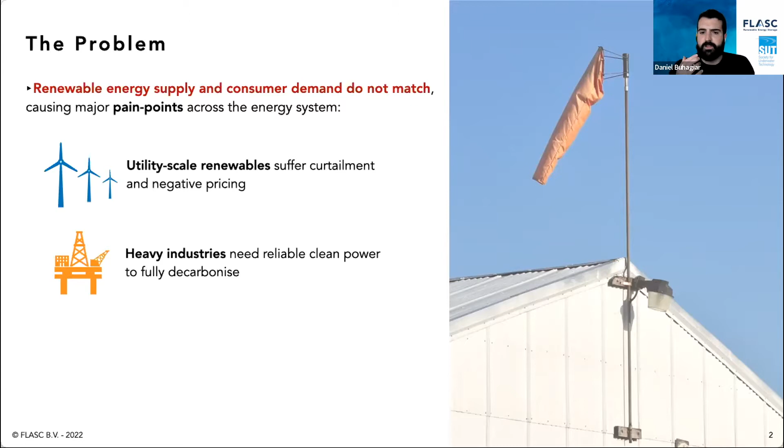And then looking at heavy industries, oil and gas primarily, that is being pressured by both government and political decisions to decarbonize, but also by shareholders and public pressure in general. Decarbonizing offshore assets in particular is challenging because, okay, you need clean power, but you also need reliable power. So it's very interesting to see projects like Hywind Tampen being done by Equinor in Norway. And yet it also raises the challenge of how far can we penetrate with variable renewables until we need storage? And then when we need storage, what are the technology options that can be deployed without introducing new safety risks or without taking up any precious topside space?

And then finally, a bit closer to home for myself, as I said, from a small island in the middle of the sea, we understand what it means to have a congested grid. Especially when it comes to introducing variable renewables, if the grid is already isolated, and even though there is a grid connection to mainland, that still introduces bottlenecks. So when we talk about decarbonizing these types of islands, there are very specific challenges, and these are then compounded by the fact that land is always at a premium and is very expensive and/or just generally unavailable. So these specific pain points are what we're trying to tackle with our solution.

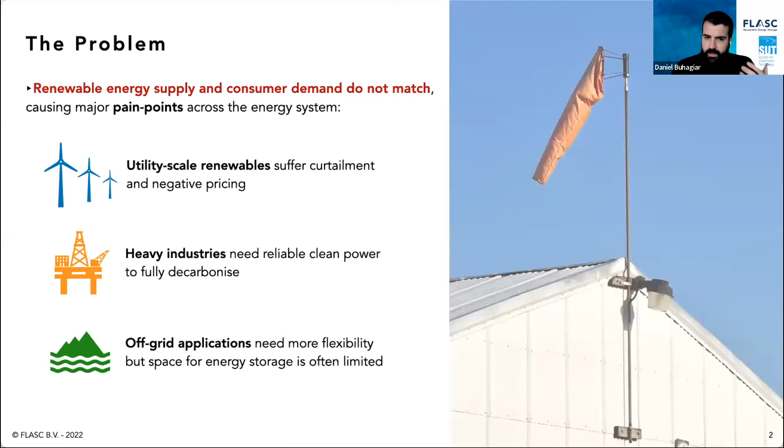And before getting into the technical stuff, just talking a bit more about our strategy with energy storage. So the first thing we identified was that we think the marine environment will be a key part of generating our renewable power. So our question at the time as academics, this was my PhD thesis, was, okay, we can produce power from the ocean, but can we also store some of that power in the ocean? Again, I think coming a bit from our small island mentality, where we look at the sea for everything, like food, energy, and all these resources, it was a natural question for us to ask. And then, of course, we'll get to how we do that. But this is really our philosophy.

So if we're deploying large quantities of offshore wind, can we also co-locate part of that space for storage? So this is one way of looking at it. It's an offshore technology, designed to be deployed offshore, but then there's a more technical way of looking at it from a timescale perspective. So I want to take a little bit of time to explain the different timescales of energy storage and what we mean when we say short duration, long duration, and then hydrogen, and how all these things come together. So this graph is from a DNV report. The technical term is residual power, but what's on the y-axis is basically supply-demand mismatch. So it's the difference between what's being supplied and what's being consumed. And this is a key aspect because it drives the need for energy storage.

And then on the x-axis, we have the different time scales. So what this means is, do I need energy in the next hour? Do I need it tomorrow? Do I need it next week or next month? So this relates to how long does the technology need to store the energy for? How long does it need to discharge it? And within this time scale, as you can see, there is a peak that was already present in 2015 that is on the multi-hourly time scale, roughly almost 1 day. So that's the period of time across which we need to shift the energy, in simple terms, charge in the morning, discharge in the evening. And then as we look at the 2050 scenario, even with different levels of renewable energy integration, this peak becomes stronger, and then we get another peak emerging on the monthly scale.

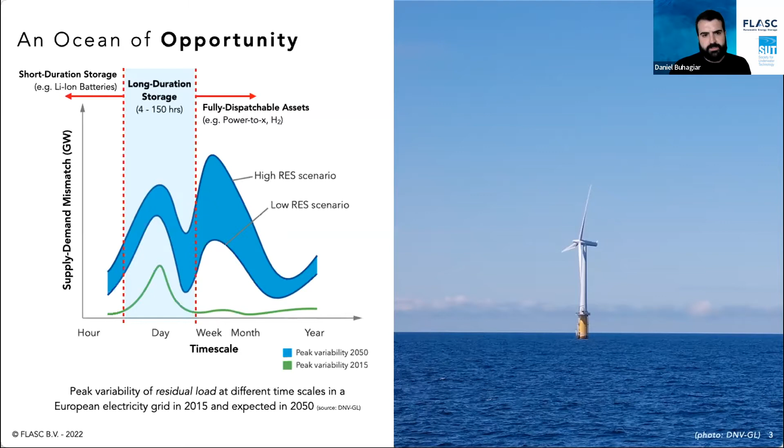So at the end of last year, the consulting firm McKinsey did us a big favor by issuing a seminal report, very detailed, justifying that there is this gap. Yes, we have batteries. Yes, we have hydrogen, but there's still a key slice in this energy storage problem that is not being addressed by either of these technologies, for which we need other solutions. They've given it a name, long duration storage, and an indicative time range. So anything between 4 to 150 hours is now being referred to as long duration storage.

So our technology fits within this gap. Sorry, I skipped a bit ahead. So it fits within this long duration technology space. There are other solutions. I'll share some of these in the technology landscape, but this is primarily where we see compressed air, pumped hydro, thermomechanical solutions, liquid air, all sorts of interesting and innovative solutions that are going to be needed to satisfy this gap.

So I've spent a bit of time on this just to justify where we are in the space. So we're not really comparable to batteries or to hydrogen, just because the energy system will need a range of technologies to address the whole energy storage timescales.

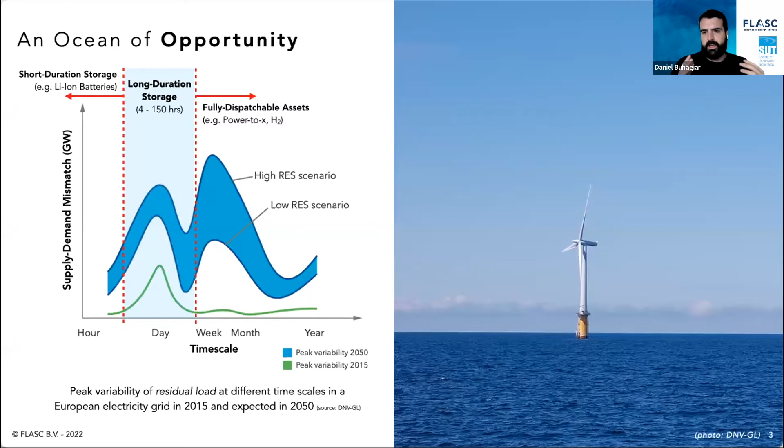So one thing that we're always challenged about is, why store energy at sea? What's the benefit? Why not just put a battery on land or a long duration compressed air storage on land? Well, what's the benefit of also having offshore energy storage technologies, much like we have land-based renewables and offshore renewables? So one thing we're seeing is that in new generation projects, for example in the Netherlands, there's already a challenge posed to developers that they are exposed to more volatility in the market. And this is expected to increase.

So already in certain offshore wind farm tenders happening this year, there are criteria where the government or the legal entity issuing the tender wants to see developers think about innovation, about what technologies can be deployed within the same wind farm project that contribute flexibility, to allow the energy produced by the overall project to be decoupled from the availability of wind. So we see that there is really a benefit, and the ability to co-locate within the same wind farm footprint means we're maximizing the use of the same space that's already been given as a concession to be developed.

I mentioned this as well, but it is a key aspect. So small islands in sensitive regions will benefit from deploying storage offshore, much like they benefit from deploying renewable systems like offshore wind or floating solar. So this has, I think, obvious benefits. And when we talk to potential users, they understand this very quickly and they see this as an interesting application of our technology.

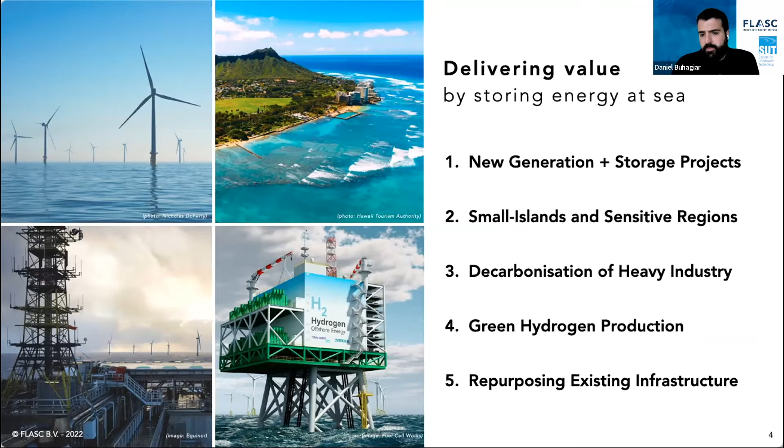So if you have a lot of wind blowing, you basically have the transformer harvesting all the wind and just transmitting it to each country. But if there's maybe not a lot of wind, you can use that spare capacity to just transfer from one side to the other. What we think will be the next generation of this, and the way we see things developing, is that we will eventually start connecting energy islands.

Some concepts are already emerging, and then also utility scale energy storage, because it really ties into this idea of very expensive offshore infrastructure that needs to be maximized. So the best way we can use this is just to have it used at its maximum capacity, and deploying part of the energy storage offshore will contribute to that and allow it to work more efficiently and be a more cost-effective overall energy system.

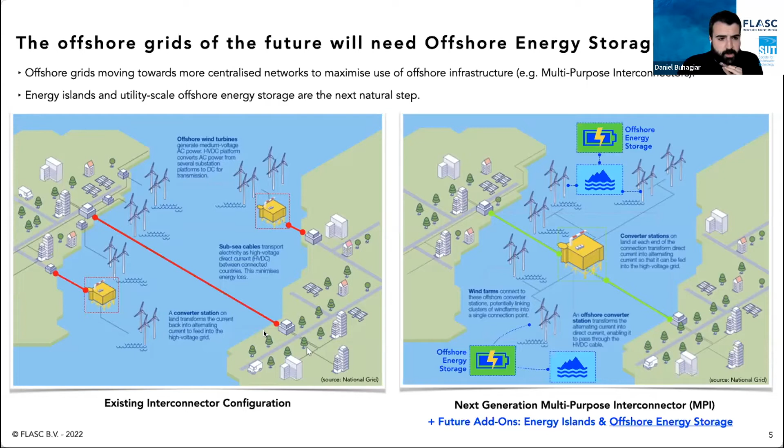So now coming to the how and what of hydro-pneumatic energy storage. The best way to explain this is to imagine a rigid vessel, could be a large tank, but basically just a rigid steel structure. Inside the structure, we have a gas that is pre-charged, so it's at a relatively high pressure.

This gas could be air or nitrogen, a safe inert gas. To charge the system, we supply electricity to a pump, which takes seawater and pushes it into this chamber. The gas is trapped, has nowhere to go, so it's confined into a smaller and smaller space, with the water acting as a liquid piston. That's the energy storage process—we use water, an incompressible fluid, to manipulate a gas, which is compressible. That's the storage part.

To recover the energy, we allow the gas to expand and push the seawater out through a hydraulic turbine, producing electricity. It's very similar to pumped hydro, when you pump water up into a reservoir, but in this case, rather than working against gravity, we are working against this pre-charged compressed gas.

Some key points: it's a highly scalable system, best suited for large scale—not something you can put in a car or a boat. It has a high round trip efficiency, and I'll explain more about this. It's well suited to the shorter end of the long duration side, like a 4 to 12 hour time scale, a good ratio between power and capacity.

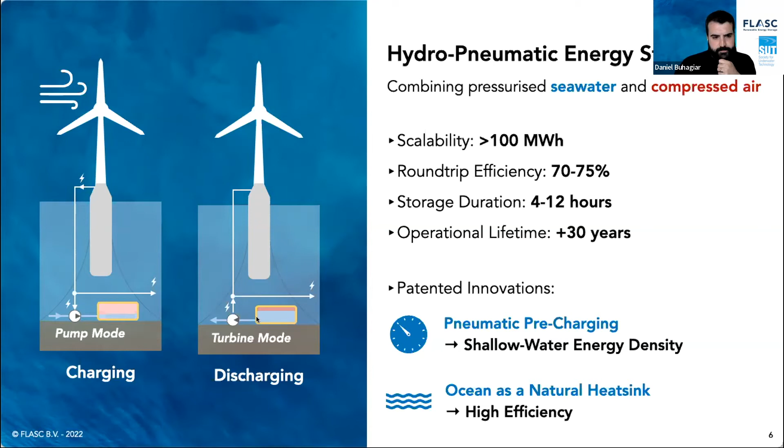I've got a more technical slide, but I was thinking to maybe insert this depending on the questions I get, if any, related to this process. In very simple terms, what we have when we charge the system is what's called isothermal compression, and when we discharge the system, we have isothermal expansion, and this leads to the high efficiency.

It's an important point because there are other losses which happen at the pump and the turbine. So if we don't have a very thermodynamically efficient system, then it's really just not going to be efficient overall.

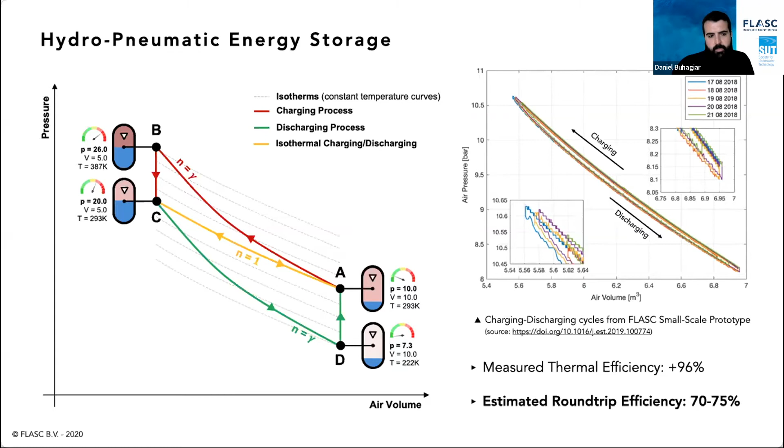So this is the part that we've really focused on, and was the scope of our first prototype campaign. This is a small scale proof of concept that we deployed in Malta back in 2018. We ran it for just over a year.

It's really small, so something like a kilowatt hour of capacity, but it allowed us to measure this thermal efficiency and get some real operational data to validate this idea that we had, which is basically if we submerge the process in the water, it will just operate at a constant temperature, because the water is very good at absorbing and recovering any heat that is produced or lost in the process.

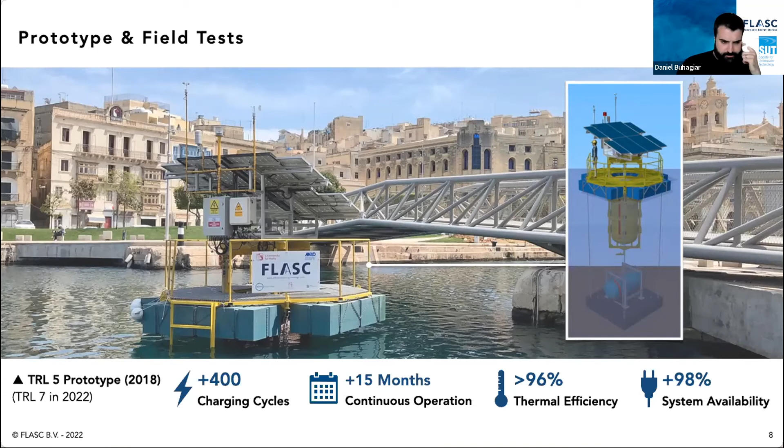So this was our first proof of concept. There's some video on our website about the deployment, and it features quite heavily because it was really our first core project.

But now coming to the actual technology itself, our focus as FLASC has been really the core hydro-pneumatic aspects. As we've spoken to different entities that are looking at this from floating wind to subsea oil and gas, everyone has their own way that they would like to see this used. So we've shied away from actually delivering a hardware module and saying this is a FLASC product, just plug it into your system.

So what we've opted to do is just look at different ways it can be deployed. We focus really on the energy conversion part, which is where we have the pumps, turbines, and control hardware—this kind of red module. And then the pressure containment part, so the large tank, in simple terms, is something we want to be doing in a collaborative environment.

So the first system that we're now working on, which is a more upscaled version of our proof of concept, is like a number 3 system. It's going to be fully integrated into a floating wind turbine. This is a project being run at our parent University of Malta, funded through the Horizon program, and will target the small island application. In fact, the funding stream is specific to providing energy to small islands.

We are working with entities that have already established platform design, and we deliver the energy conversion part as a hardware module. Then another embodiment that we're working on, because we think it's really interesting, is something like a number 4 or a number 1, so basically an elongated subsea structure.

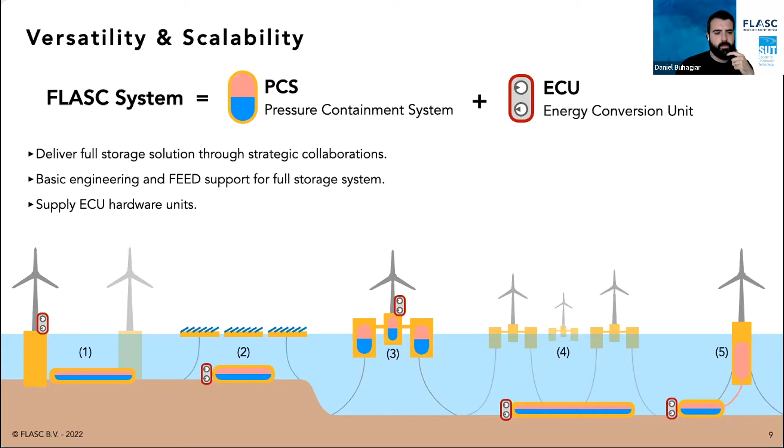With this in mind, I'll now come to the collaboration that we have with Subsea 7, focused on developing what we call a power bundle. I don't know if you're familiar with subsea bundles, but they are basically elongated structures that allow fluid to be transferred from one side to another. Typically this is how they've been used in oil and gas, in very simple terms.

They are a very robust technology with an established fabrication process, and there's a site in Wick, Scotland, where these can be built up to 7 kilometers. So what we're doing within this collaboration with Subsea 7 is deploy our core hydro-pneumatic technology within the bundle. In very simple terms, it's like blocking off one end and then just using the volume inside the bundle as a pressure containment system.

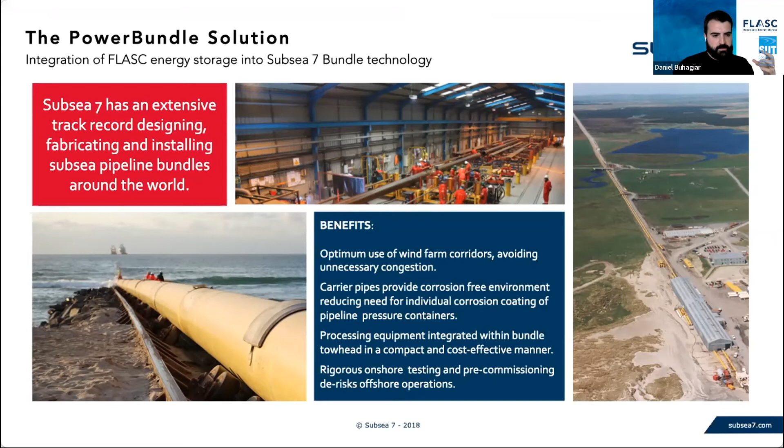So if we come back to the slide, this long section that goes into the screen is the actual pressure containment part. And then the towhead structure is where we can put the energy conversion unit—the pumps, the turbines—and then we just have an electrical connection.

What we particularly like about this embodiment is that it fits very well with the offshore wind farm architecture. If we look at a wind farm from above, we see the turbines like little dots, but between them there's a lot of space needed for aerodynamic reasons to keep the efficiency high, and that's where the inter-array cables are laid. A wind farm of like a gigawatt of power output would have hundreds of kilometers of inter-array distances.

And that's where we can deploy this type of solution, fitting within that same corridor. So superimposed on the wind farm, we now have a grid of these power bundles providing megawatt hours or even gigawatt hours of storage. I actually have a short animation that shows this power bundle concept, so I'll go through this, looking first at this offshore wind application.

So this is like a conventional bottom-fixed wind farm. There's some artistic license here in terms of the distances, just so we can see everything on the same screen. But as you can imagine, there's quite a long distance between each monopile and the other.

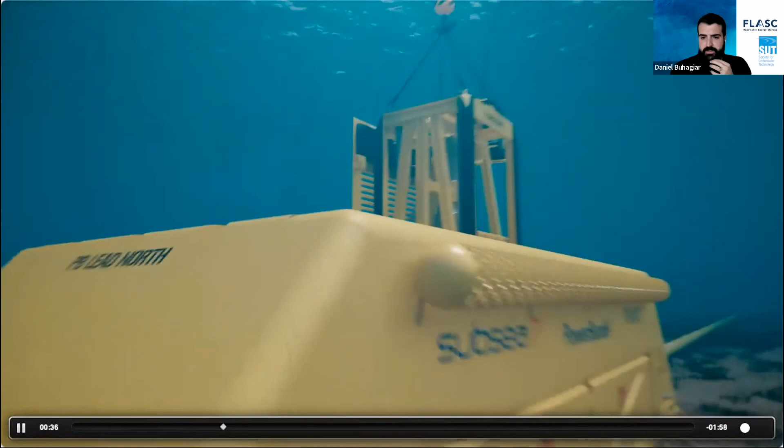You can now see these yellow tubes laid out, which are the pressure containment part of the storage system. Then at each end there's a towhead. The pump and turbines are modular, so they can be retrieved and serviced or replaced as needed.

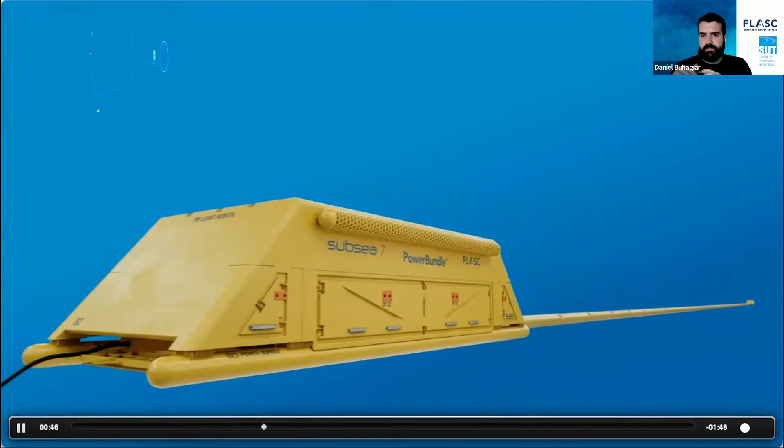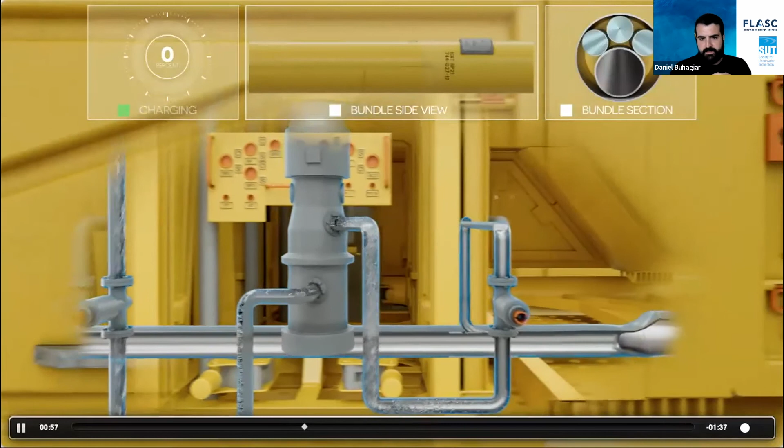Coming a bit more into the working principle, as I've already explained: with the system discharged we just have gas, and then we start pumping water. This is a subsea pump taking seawater and pushing it into the bundle. In this case there's a pig that separates the water and the air, and as that water is pumped, the pig moves and compresses the gas further and further into the bundle. The charging increases as the pig reaches the other end of the bundle.

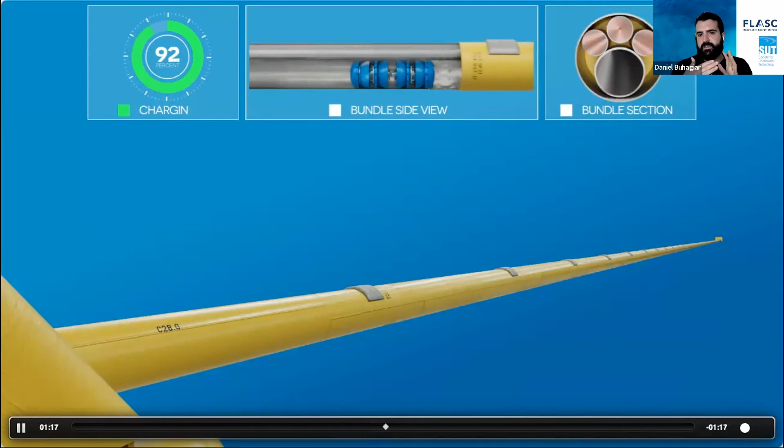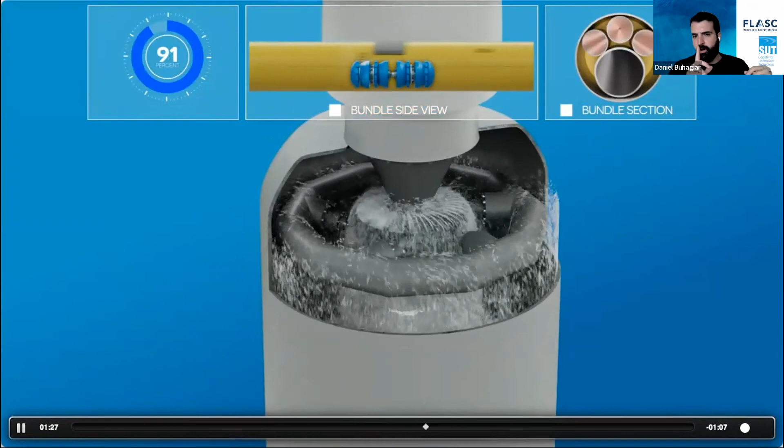The top part just contains the now fully compressed gas. So there's always some gas in the system, and now that gas is expanding and pushing the water in the opposite direction, allowing the energy to be recovered through a hydraulic turbine.

So now we have the electricity we put into the system, and we're able to get it back, and it's just an electrical connection. As you can see on the left-hand side, it's just a cable. So it's agnostic to any power source, could be wind, wave, solar. It's really just about storing electricity.

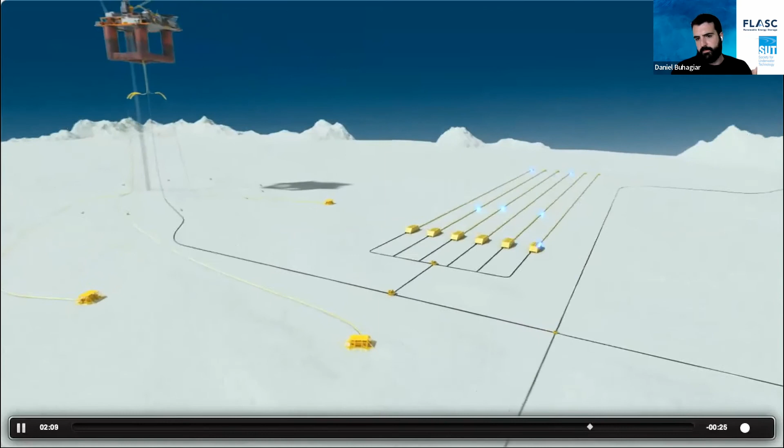Another application I mentioned is, of course, these isolated oil and gas applications. So a floating wind farm now connected to an oil and gas platform. This shows a different system architecture with the bundles deployed as an array, providing utility-scale storage for, in this case, an oil and gas application.

This features quite heavily in our collaboration with Subsea 7, and we've now secured some funding through UK-based sources in order to do a FEED study for a demonstration project, which will hopefully be deployed in the coming year. So we're just now going through more of the detailed engineering.

One thing I wanted to touch on is the market. This comes back to the long duration question: what does the market look like for these technologies? I have to say it's really early days, so there's a lot of questions on what kind of revenue streams these will generate, and specifically how will they make money—that's the big question.

Again, within this McKinsey study, there's an important gap with a large installed capacity, depending on different renewable energy system scenarios, and that means also a very substantial capex investment that will be needed over the coming decades. As you can see, 2025 doesn't even show up on the curve—we're really in the early stages of this.

The first signals we're seeing are funding bodies, as I mentioned, UK-based, and also in the US there's some funding being dedicated to these types of technologies—not batteries, not hydrogen, but this long duration gap.

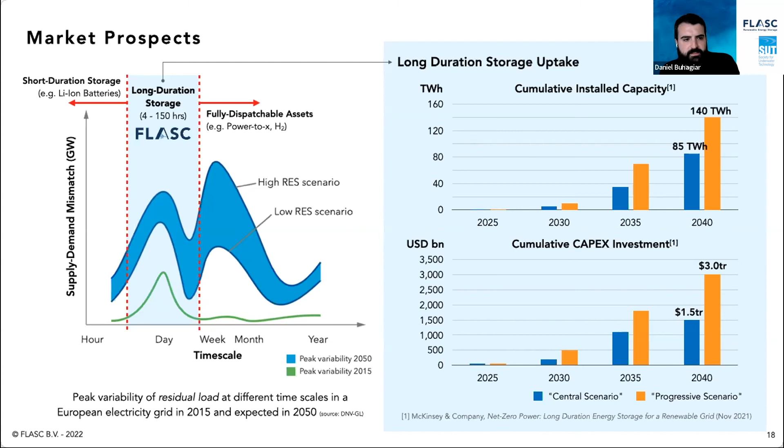On that theme of different technologies, this is a bit about the technology landscape. There's quite a wide range of technologies available. Some land-based solutions include compressed air, different variants of that, and also some land-based hydro-pneumatic storage. There's electrothermal storage, gravity, liquid air, and other concepts I couldn't include here. But the general idea is that this is really large infrastructure.

It requires substantial space and sometimes repurposing existing facilities. So this kind of paints the picture of what our technology is comparable to. So when we talk about kilometers of bundle, we're not comparing this to like a battery in a container. And again, the land-based solutions will be a key part of this.

But much like there are onshore wind and offshore wind, we also think that there will be the need for offshore storage. And in the space, there's, as I mentioned, some concepts that use hydrostatic pressure. So like these large spheres that are storing energy by being drained, and then you drain the sphere in order to charge the system, and then you allow the water to flood back in, and that is the generation part. Very elegant concepts, as I said, but you do need substantial water depth.

So with our overpressure solution, as it's sometimes called, where we have this pre-charged system, we can deploy it in relatively shallow water below like 400 meters and have significantly higher energy density, which is why we think it's really uniquely positioned for co-location with offshore wind. And we're also quite happy to see legislation changing to favor like behind the meter storage, for example, in the UK with the CFD mechanism for subsidizing wind.

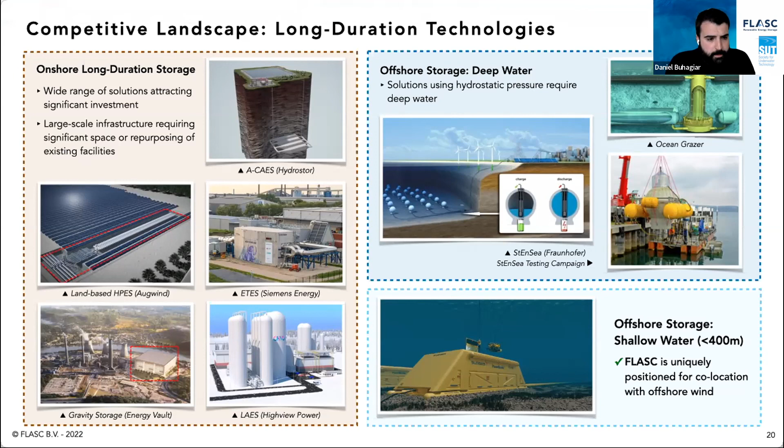And to give a bit of an overview of where we are now and where we're going, this is our timeline. We started with a concept. This was, as I said, originally part of my PhD thesis, but with time we managed to build stuff and we started to see commercial potential. A big part of that was also going out and talking to entities like Subsea 7 and seeing that there's ways to use this technology that we weren't necessarily aware of, like in oil and gas and these kinds of things.

We early in the process secured the IP, so we had patents to protect this, and that actually allowed us to go and talk to various entities and see how it can be used. And one thing we also did quite early in the process is talk to DNV and get a statement of feasibility around the various subcomponents.

So what we see is that offshore is a great space to innovate in because it's a really interesting technology space, but it's not easy to convince people to take new risks with new technologies. So as innovative as our system is, it is using established subcomponents. So pumps, pressure vessels, turbines, valves, these are all things that have been deployed before. We're just reconfiguring them to create an innovative solution. But ultimately, the core technology is very well understood, and we know how to maintain it, how to operate it, and how to install it.

So then we did our proof of concept, but now we're looking at upscaling the technology. So we want to be able to reach TRL 7 next year. And this will be part of this floating wind project targeting small islands. The idea is to have a multi-purpose platform. We had an interesting design challenge here, that it had to be a portable structure, so we couldn't put anything on the seabed, which is why we integrated it into the floater.